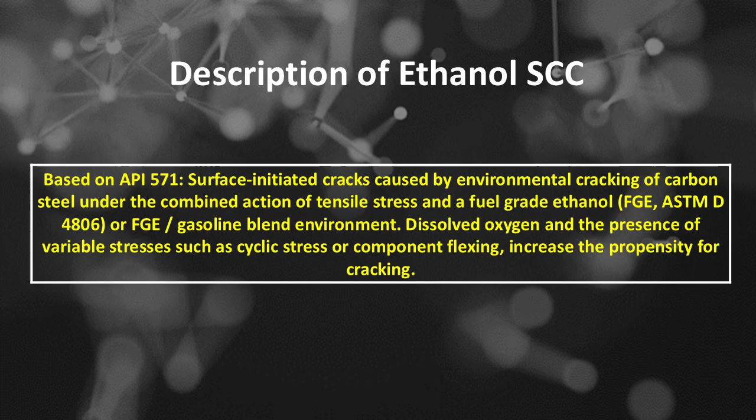Ethanol stress corrosion cracking, or SCC, is a damage mechanism that is part of environment-assisted cracking. Per API 571, it describes surface-initiated cracks caused by environmental cracking of carbon steel under the combined action of tensile stress and a fuel-grade ethanol (FGE, ASTM D4806) or FGE/gasoline blend environment. Dissolved oxygen and variable stresses such as cyclic stress or component flexing increase the propensity for cracking.

Introduction: Stress corrosion cracking, or SCC, is a failure mechanism characterized by the growth of cracks in a material subjected to tensile stress in a corrosive environment. When this occurs specifically in ethanol-containing environments, it is referred to as ethanol stress corrosion cracking. It is a form of environmentally assisted cracking, where the combined effects of chemical environment, tensile stress, and microstructural susceptibility lead to crack initiation and propagation, often resulting in sudden and catastrophic failure of metallic components.

Mechanisms of ethanol SCC damage: Number 1 is environment and chemistry. Ethanol, or C2H5OH, is an alcohol used as a fuel additive, solvent, or industrial chemical. Ethanol environments can be acidic, neutral, or alkaline, with corrosivity influenced by impurities, temperature, and other factors. Ethanol can decompose or react at high temperatures or in the presence of catalysts, producing reactive species such as acetaldehyde, acetic acid, or hydrogen, which can influence corrosion behavior.

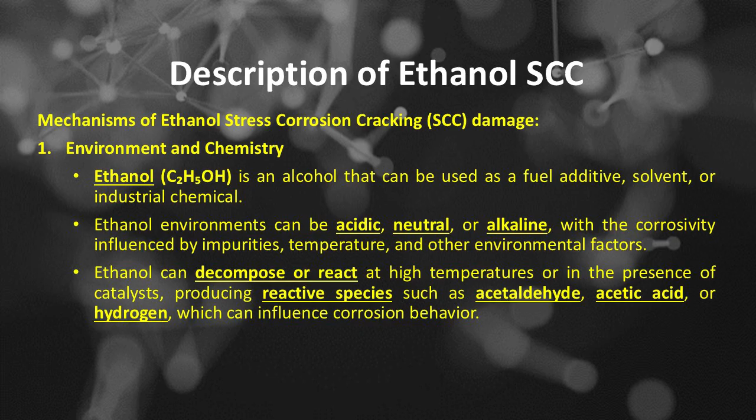Mechanisms of ethanol SCC damage: Number 2 is material susceptibility. Materials vulnerable to ethanol SCC include certain carbon steels, stainless steels, aluminum alloys, and other high-strength alloys. Susceptibility depends on microstructure, alloy composition, heat treatment, and initial residual stresses.

Mechanisms of ethanol SCC damage: Number 3 is crack initiation, which starts at microvoids, inclusions, microstructural heterogeneities, or pre-existing flaws. Localized corrosion or pitting at the surface can serve as initiation sites, and elevated tensile or residual stresses facilitate crack nucleation.

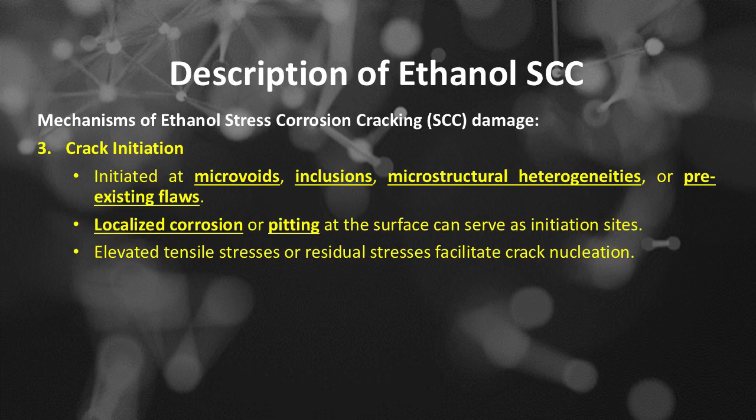Mechanisms of ethanol SCC damage: Number 4 is crack propagation. Crack growth occurs via hydrogen-assisted cracking, film rupture, or intergranular attack. The environment affects film formation on the metal surface; in some cases passivating films, such as oxide layers, may form, but ethanol environments can disrupt these films. The cyclic formation and rupture of protective films create recurrent corrosion sites. Cracks tend to propagate intergranularly or transgranularly depending on the material and environment.

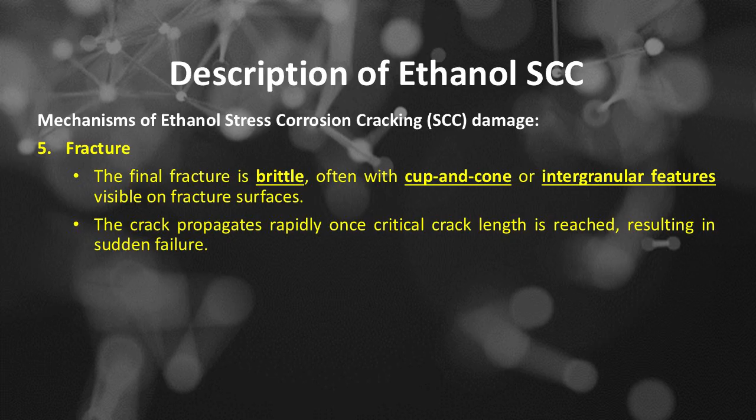Mechanisms of ethanol SCC damage: Number 5 is fracture. The final fracture is brittle, often with cup and cone or intergranular features visible on fracture surfaces. The crack propagates rapidly once critical crack length is reached, resulting in sudden failure.

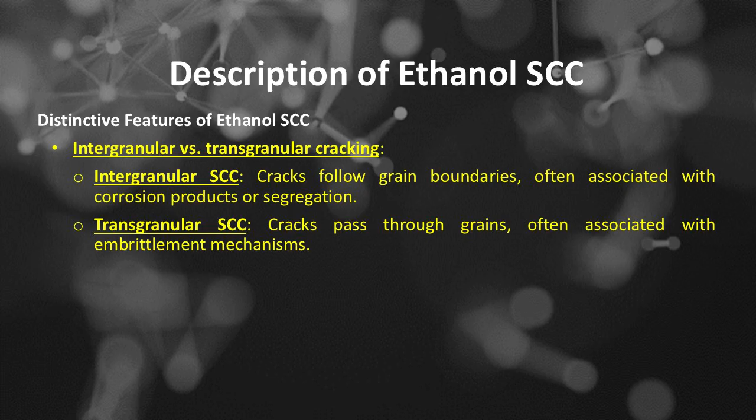Distinctive features of ethanol SCC include environmental dependence, where the presence of ethanol, especially at elevated temperatures, enhances susceptibility. Temperature sensitivity: higher temperatures accelerate corrosion reactions and crack growth. Hydrogen involvement: hydrogen generated during corrosion may diffuse into the metal, facilitating hydrogen embrittlement and crack growth. Microstructure effects: materials with certain microstructures, such as coarse grains or inclusions, are more prone. Intergranular versus transgranular cracking: intergranular SCC cracks follow grain boundaries, often associated with corrosion products or segregation.

Transgranular SCC cracks pass through grains, often associated with embrittlement mechanisms. Factors influencing ethanol SCC: Factor 1, temperature—elevated temperatures increase chemical reaction rates, promoting SCC. Factor 2, ethanol purity and impurities—impurities like water, acids, or other contaminants can increase corrosivity. Factor 3, stress level—tensile stresses above a certain threshold promote crack initiation and growth. Factor 4, material microstructure—grain size, inclusions, and phase distribution influence susceptibility. Factor 5, environmental cycling—fluctuations in environment, such as wet or dry cycles, can accelerate crack propagation.

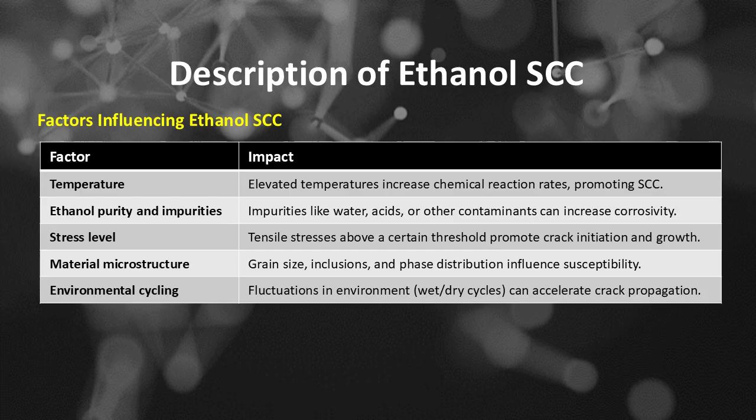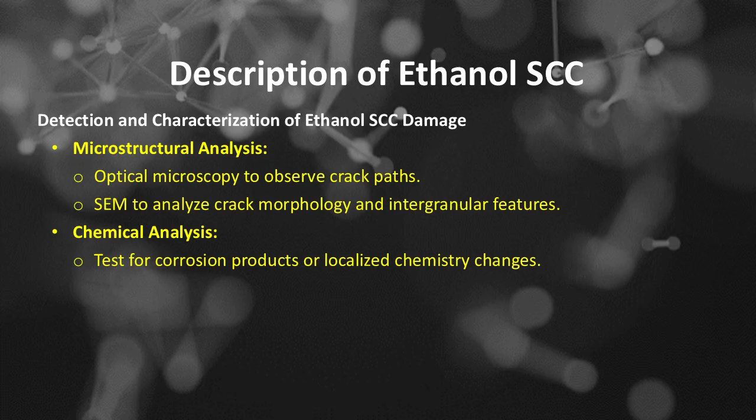Detection and characterization methods for ethanol SCC damage include visual inspection to detect surface cracks, corrosion pits, and blistering; non-destructive testing (NDT) such as ultrasonic testing for internal cracks, eddy current testing for surface crack detection, radiography for internal flaw detection, and replicate fractography or SEM analysis of fracture surfaces. Microstructural analysis includes optical microscopy to observe crack paths, SEM to analyze crack morphology and intergranular features, and chemical analysis to test for corrosion products or localized chemistry changes.

Preventive and mitigation strategies for ethanol SCC damage: first, material selection—using corrosion-resistant alloys or materials with microstructures less susceptible to cracking. Second, environmental control—reducing ethanol temperature or limiting exposure, and removing impurities and controlling water content. Third, stress management—minimizing residual stresses via heat treatments and designing components to avoid stress concentrators.

Preventive and mitigation strategies of ethanol SCC damage continue with the fourth: protective coatings, applied as barrier coatings to prevent ethanol contact.

The fifth is cathodic protection. Its purpose is to use appropriate cathodic systems to suppress corrosion. The sixth is regular inspection and monitoring.

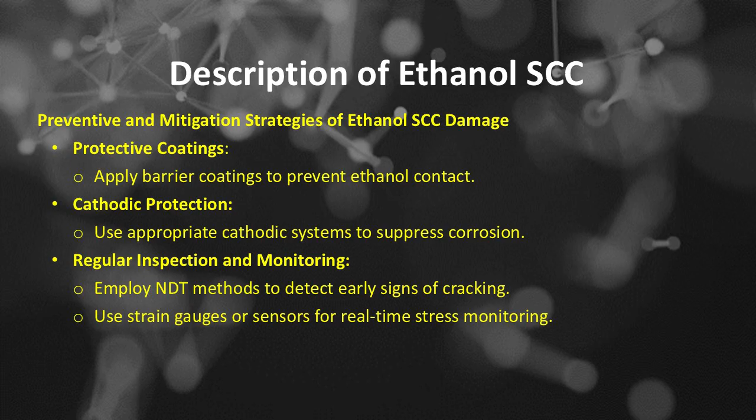Its purpose is to employ NDT methods to detect early signs of cracking and use strain gauges or sensors for real-time stress monitoring. Ethanol stress corrosion cracking is a complex failure process involving the synergistic effects of chemical environment, tensile stresses, and material susceptibility. It typically manifests as intergranular or transgranular cracks that can grow rapidly once initiated, leading to sudden failure.

Understanding the environmental conditions, microstructural factors, and stress state is vital for preventing and controlling ethanol SCC in critical components. Ethanol stress corrosion cracking affects materials based on API 571. Number A, all grades of carbon steel are susceptible.

Number B, ethanol SCC has not been reported in materials other than carbon steel, but general corrosion may be a concern with other materials including some alloys of aluminum, copper and copper alloys, lead and zinc. Number C, FGE and blends with gasoline may adversely affect non-metallic materials, for example coatings and seals, causing swelling, hardness changes, etc.

Here's a detailed overview of materials affected by ethanol stress corrosion cracking or SCC. Ethanol SCC primarily impacts metals and alloys that are exposed to ethanol-containing environments under tensile stresses. The susceptibility varies based on the material's composition, microstructure, surface condition, and operational environment. Below is a comprehensive analysis of the key materials affected, along with their susceptibility and the factors influencing their vulnerability.

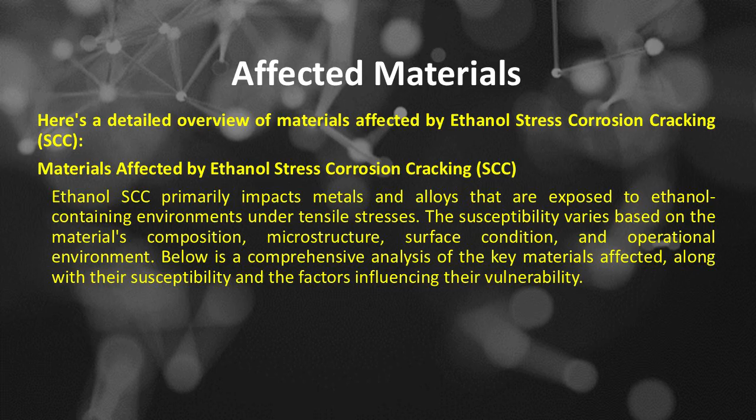Materials affected by ethanol stress corrosion cracking or SCC. Number 1 is carbon steels. Carbon steels are widely used in pipelines, tanks, and structural components. They are composed mainly of iron with varying carbon content.

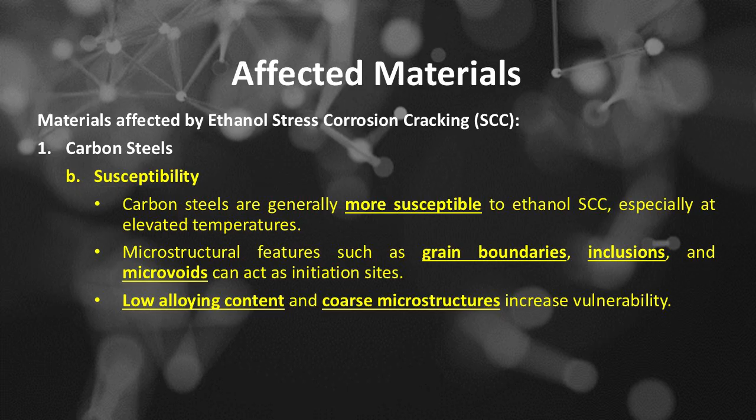Susceptibility of carbon steels includes: carbon steels are generally more susceptible to ethanol SCC, especially at elevated temperatures. Microstructural features such as grain boundaries, inclusions, and microvoids can act as initiation sites. Low alloying content and coarse microstructures increase vulnerability.

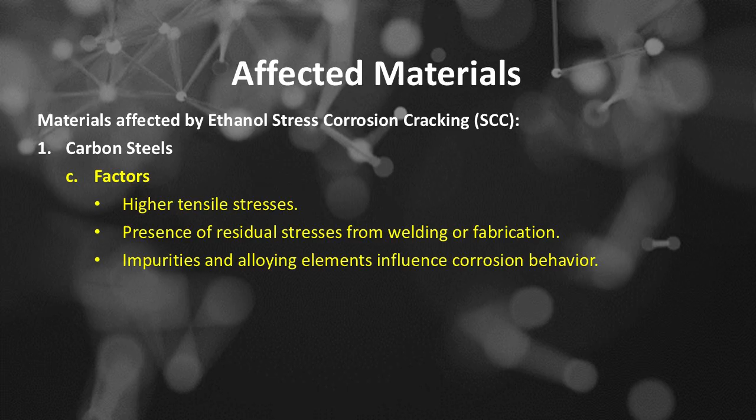Carbon steel factors affected by ethanol SCC include higher tensile stresses, presence of residual stresses from welding or fabrication, and impurities and alloying elements that influence corrosion behavior.

Materials affected by ethanol stress corrosion cracking or SCC. Number 2 is stainless steels, including: A, austenitic stainless steels, such as types 304, 316, generally resistant to many forms of SCC in aqueous environments, however susceptible under specific conditions involving ethanol at elevated temperatures or in aggressive environments. B, ferritic and martensitic stainless steels are more prone to SCC in ethanol environments due to their microstructural characteristics and lower corrosion resistance.

Stainless steel susceptibility factors affected by ethanol stress corrosion cracking or SCC include presence of chlorides or other halides, which can enhance SCC sensitization, chromium carbide precipitation at grain boundaries increasing intergranular attack, and microstructural heterogeneities like inclusions or segregation.

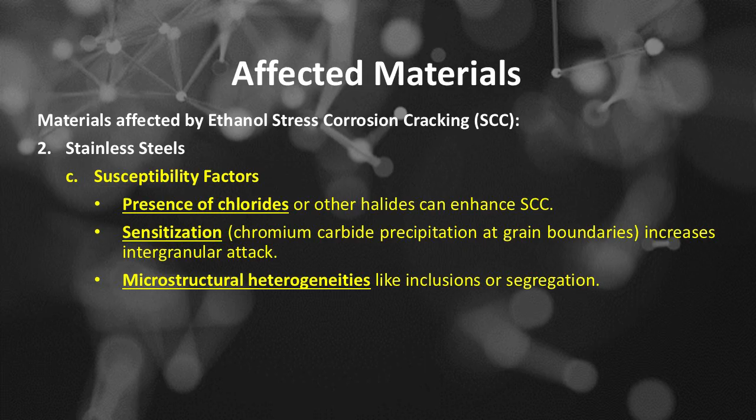Materials affected by ethanol stress corrosion cracking or SCC. Number 3 is aluminum and aluminum alloys, generally less susceptible to ethanol SCC. However, high-strength aluminum alloys, especially those with intergranular precipitation or microstructural defects, may experience localized corrosion or cracking under stress in ethanol environments.

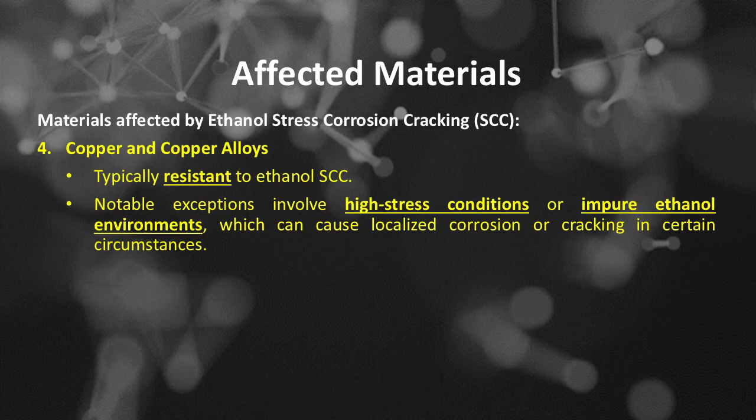Materials affected by ethanol stress corrosion cracking or SCC. Number 4 is copper and copper alloys, typically resistant to ethanol SCC. Notable exceptions involve high-stress conditions or impure ethanol environments, which can cause localized corrosion or cracking in certain circumstances.

Materials affected by ethanol stress corrosion cracking or SCC. Number 5 is nickel and nickel alloys, such as Inconel, Monel. High corrosion resistance makes them less susceptible. Inconel alloys, such as Inconel 600 or 625, are often used in harsh environments, but susceptibility increases if microstructural heterogeneities or impurities exist.

Materials affected by ethanol stress corrosion cracking or SCC. Number 6 is high-strength alloys and superalloys. High-strength steels and superalloys, such as Inconel, Hastelloy, may resist SCC in some environments but can become susceptible under high tensile stresses, especially at elevated temperatures.

Materials affected by ethanol stress corrosion cracking or SCC. Number 7 is other metallic materials. Titanium and titanium alloys are generally resistant but can be affected under specific conditions, especially if contaminated or under high stress.

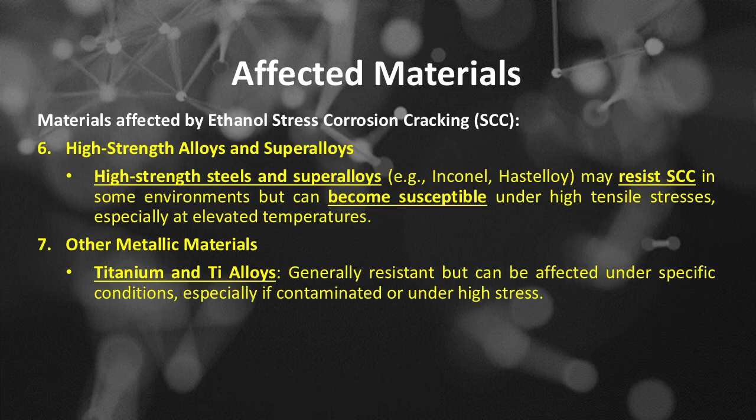Factors affecting material susceptibility to ethanol stress corrosion cracking include grain size and inclusions. Finer grains often reduce susceptibility, while inclusions increase SCC risk. Presence of impurities or segregations promotes localized attack or stress corrosion cracking. Heat treatment or microstructural instability leads to susceptibility to sensitization, increasing intergranular SCC risk. Elevated temperature and impurities increase susceptibility to ethanol stress corrosion cracking.

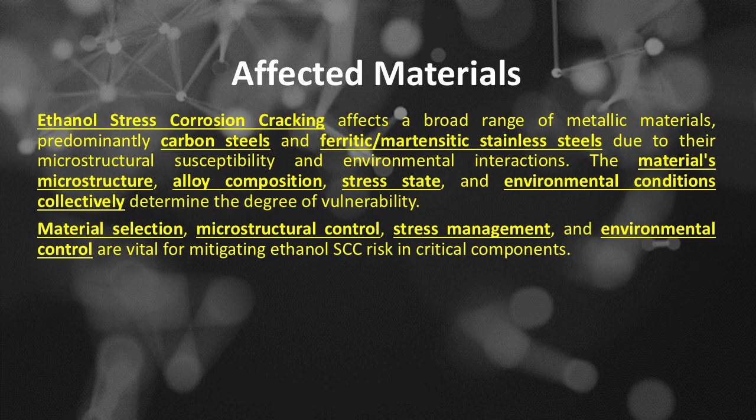Ethanol stress corrosion cracking affects a broad range of metallic materials, predominantly carbon steels and ferritic/martensitic stainless steels, due to their microstructural susceptibility and environmental interactions. The material's microstructure, alloy composition, stress state, and environmental conditions collectively determine the degree of vulnerability. Material selection, microstructural control, stress management, and environmental control are vital for mitigating ethanol SCC risk in critical components.

Ethanol stress corrosion cracking damage mechanisms. Critical factors based on API 571, Number A: several factors have been identified by field observations.

Stress may be applied or residual. Highly stressed, locally cold worked components or components with stress concentrators are susceptible to cracking. Variable stresses, such as those produced by loading and unloading of tanks, have led to cracking in tank bottoms and floating roofs.

Cracking has been found to occur in FGE meeting ASTM D4806 specifications, including the water content requirement. Corrosion inhibitors may be added to ethanol to prevent general corrosion in vehicle fuel systems, but their effect on SCC is not fully understood.

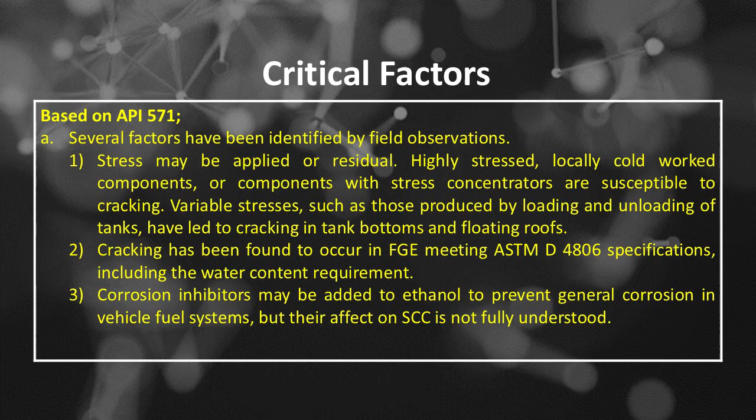Other factors have been identified in controlled laboratory conditions using conservative slow strain rate test (SSRT) methods, which stress the steel sample to failure. Evidence of SCC is based on the stress or strain behavior and an examination of the fracture surfaces.

Aeration: the dissolved oxygen content of the ethanol appears to be the most important factor for determining ethanol SCC susceptibility. Cracking has not been found under deaerated conditions.

The maximum potential for ethanol SCC occurs within a narrow range of water content, between 0.1 and 4.5 vol%. Ethanol SCC has been found to occur in blends of FGE and gasoline containing as little as 20 vol% FGE. Galvanic coupling of a new steel to corroded steel increases the likelihood of ethanol SCC.

Increasing the chloride content of the ethanol tends to increase the severity of cracking and changes the crack type from mainly intergranular, found in the field, to transgranular cracking.

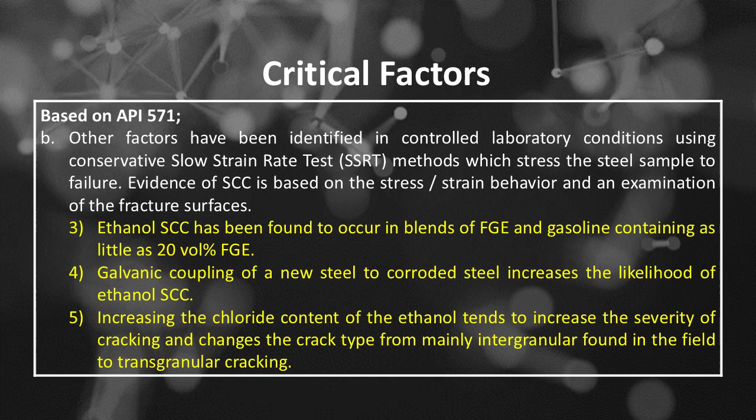Here's a comprehensive and detailed explanation of the critical factors that influence ethanol stress corrosion cracking (SCC) damage. Ethanol SCC is a complex phenomenon governed by the interplay of environmental, material, and operational parameters. The critical factors are those conditions or properties that must be present or exceed certain thresholds to initiate and propagate SCC. Understanding these factors is essential for predicting, preventing, and controlling ethanol SCC damage.

Critical factors influencing ethanol SCC include, number 1, environmental factors: A) ethanol composition and purity. Ethanol concentration: higher ethanol content generally increases the risk of SCC due to enhanced chemical reactivity and corrosivity. Impurities: presence of water, acids, halides such as chlorides, or other contaminants can significantly increase corrosivity. Decomposition products: at elevated temperatures, ethanol can produce reactive species such as acetaldehyde, acetic acid, or hydrogen, which influence corrosion processes.

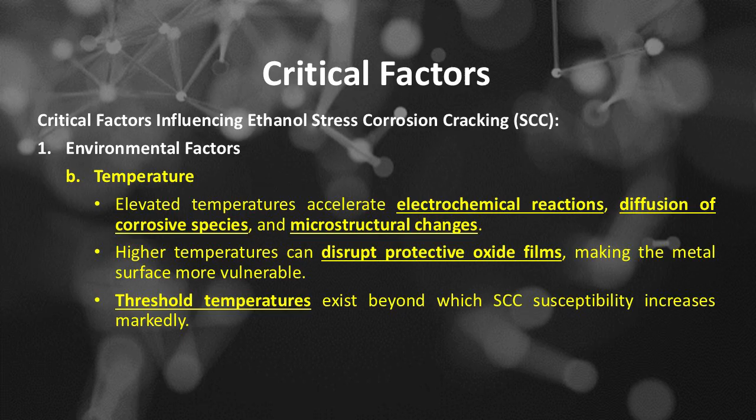Environmental factors, B) temperature. Elevated temperatures accelerate electrochemical reactions, diffusion of corrosive species, and microstructural changes. Higher temperatures can disrupt protective oxide films, making the metal surface more vulnerable. Threshold temperatures exist beyond which SCC susceptibility increases markedly.

Environmental factors, C) pH and electrochemical conditions. Acidic or neutral environments tend to promote corrosion. Changes in pH can alter passivity and film stability on metal surfaces. The presence of chlorides or halides can break down passive films and promote localized attack.

Environmental factors, D) cyclic environmental conditions. Fluctuations between wet and dry states can cause repetitive film formation and rupture, promoting crack initiation and growth. Temperature cycling can induce thermal stresses that synergize with chemical attack.

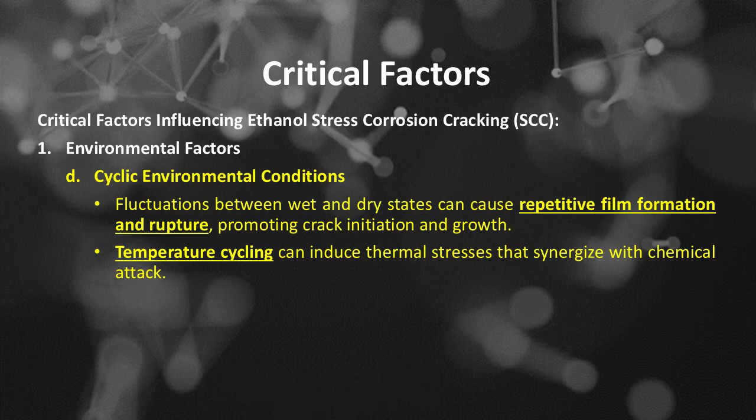Critical factors influencing ethanol SCC, number 2, material factors: A) microstructure of the material. Grain size: finer grains often have higher susceptibility due to larger grain boundary area. Inclusions and segregations: non-metallic inclusions or segregated impurities act as initiation sites. Heat treatment state: sensitized microstructures with chromium carbide precipitation at grain boundaries are more vulnerable.

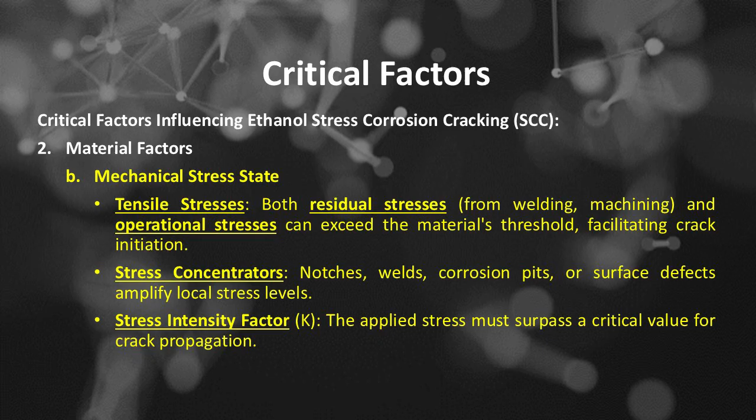Material factors, B) mechanical stress state, tensile stresses. Both residual stresses, from welding and machining, and operational stresses can exceed the material's threshold, facilitating crack initiation. Stress concentrators: notches, welds, corrosion pits, or surface defects amplify local stress levels. Stress intensity factor K: the applied stress must surpass a critical value for crack propagation.

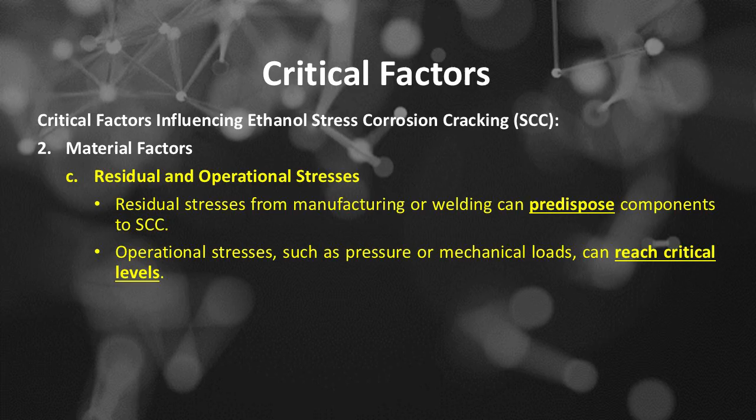Material factors, C) residual and operational stresses. Residual stresses from manufacturing or welding can predispose components to SCC. Operational stresses, such as pressure or mechanical loads, can reach critical levels.

Material factors, D) material susceptibility. Alloy composition, microstructural stability, and surface condition influence vulnerability. High-strength alloys often have higher susceptibility due to their susceptibility to embrittlement under corrosive conditions.

Critical factors influencing ethanol SCC, number 3, environmental material interaction factors: A) protective film formation and stability. Passivity: formation of oxide or film layers that protect the surface. Film breakdown: ethanol environments can disrupt or prevent stable passive film formation. Repassivation rate: the ability of the material to reform protective films after rupture influences SCC susceptibility.

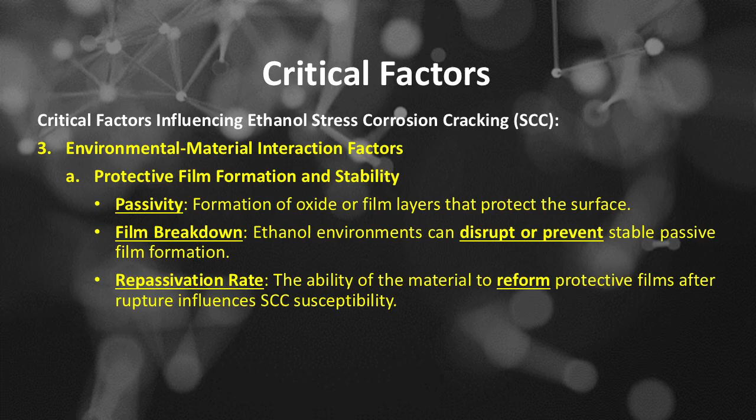Critical factors influencing ethanol SCC, number 4, operational and design factors: A) stress level and distribution. Stresses exceeding the material's threshold are critical.

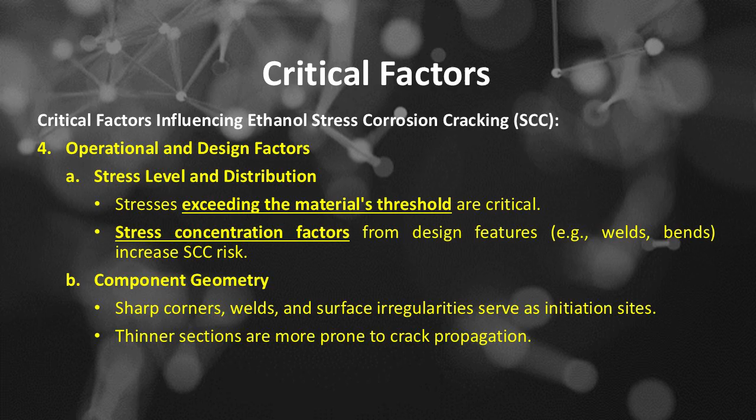Stress concentration factors from design features, such as welds and bends, increase SCC risk. Operational and design factor B is component geometry: sharp corners, welds, and surface irregularities serve as initiation sites, while thinner sections are more prone to crack propagation.

Critical factors influencing ethanol stress corrosion cracking, or SCC. Number 5 is threshold and critical conditions: critical stress intensity factor, the minimum stress intensity required for SCC crack growth; critical environment composition, a threshold ethanol purity, impurity level, or temperature that must be exceeded for SCC to occur; and time to crack initiation, the time required for microcracks to form under given conditions.

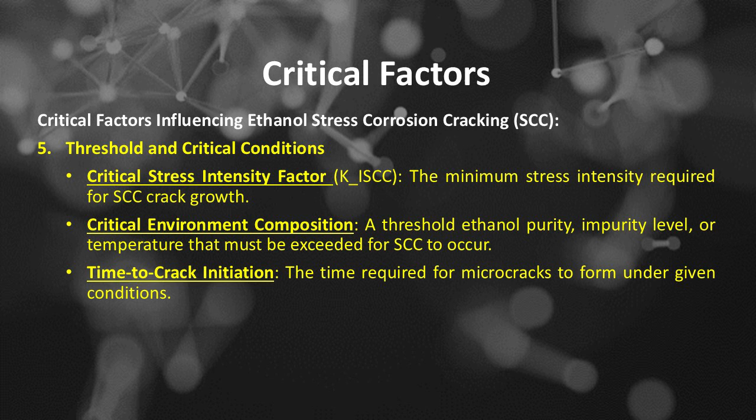The critical factors for ethanol SCC damage are those that create a conducive environment for crack initiation and provide the necessary stresses and microstructural vulnerabilities for crack growth. These include elevated temperature, tensile stresses surpassing threshold levels, microstructural features, presence of impurities, and disruption of protective films. Effective mitigation involves controlling these factors, such as reducing residual stresses, selecting resistant materials, maintaining favorable environmental conditions, and implementing appropriate inspection regimes.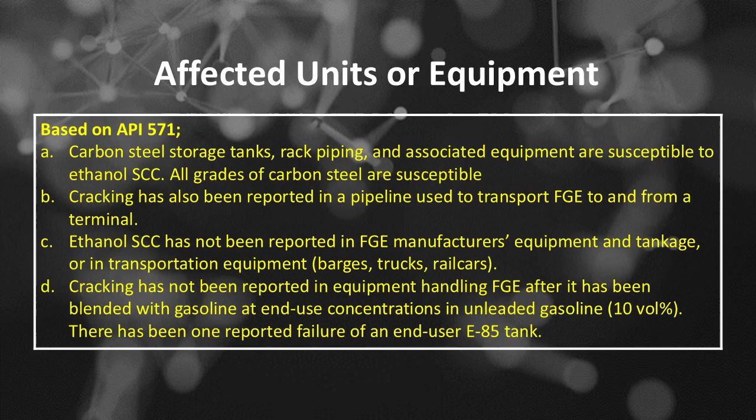Number B: cracking has also been reported in a pipeline used to transport FGE to and from a terminal. Number C: ethanol SCC has not been reported in FGE manufacturers' equipment and tankage, or in transportation equipment such as barges, trucks, and railcars. Number D: cracking has not been reported in equipment handling FGE after it has been blended with gasoline at end-use concentrations in unleaded gasoline, 10 vol%. There has been one reported failure of an end-user E85 tank.

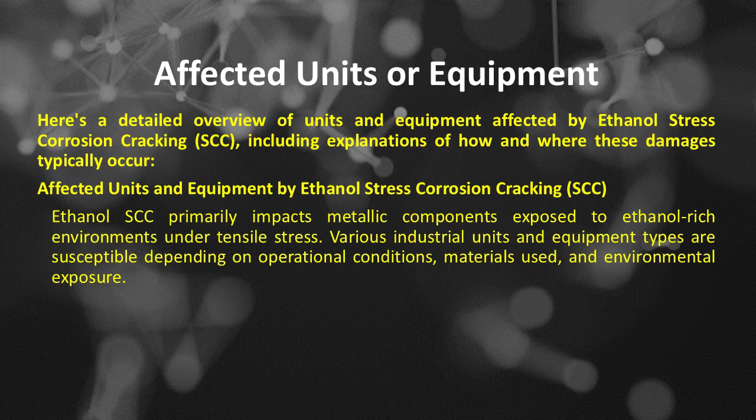Here's a detailed overview of units and equipment affected by ethanol stress corrosion cracking, SCC, including explanations of how and where these damages typically occur. Ethanol SCC primarily impacts metallic components exposed to ethanol-rich environments under tensile stress. Various industrial units and equipment types are susceptible depending on operational conditions, materials used, and environmental exposure.

Affected units and equipment by ethanol stress corrosion cracking includes, number 1, pipelines and storage systems, used for transport of ethanol and ethanol-containing fuels, widely used in oil, gas, fuel distribution, and chemical industries. Susceptible locations include welded joints and heat-affected zones, HAZ, where microstructural heterogeneities make these areas vulnerable.

Other susceptible locations include bends, elbows, and T's, which are locations with high stress concentration, as well as thin sections or corrosion pits, which are microdefects that can initiate cracking. Damage manifestation includes longitudinal or transverse cracks starting at welds or defect sites, with propagation leading to leaks, ruptures, or catastrophic failures.

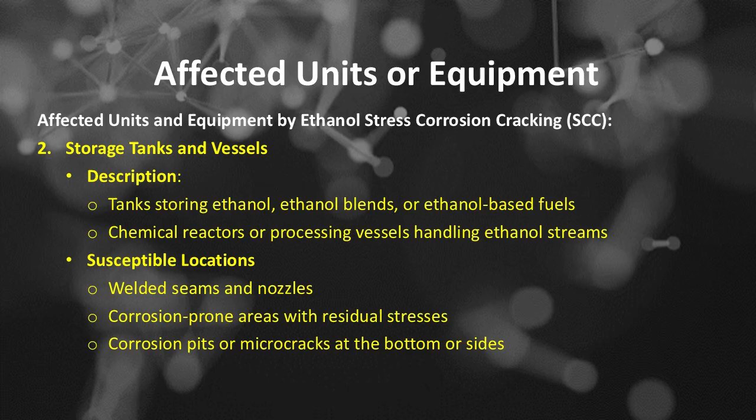Affected units and equipment by ethanol stress corrosion cracking, number 2, storage tanks and vessels, includes tanks storing ethanol, ethanol blends, or ethanol-based fuels, as well as chemical reactors or processing vessels handling ethanol streams. Susceptible locations include welded seams and nozzles, corrosion-prone areas with residual stresses, and corrosion pits or microcracks at the bottom or sides.

Damage manifestation includes cracks propagating from weld defects or corrosion sites, with potential for sudden leaks or structural failure, especially under internal pressure. Affected units and equipment, number 3, heat exchangers, includes devices exchanging heat between ethanol-containing fluids and other process streams, with components including tubes, shells, headers, and welds.

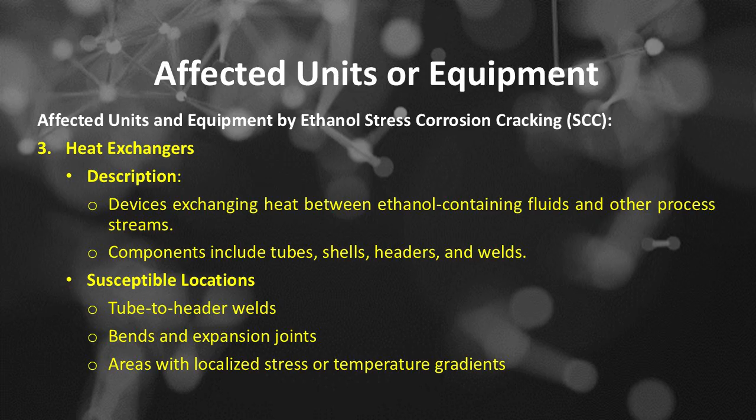Heat exchangers' susceptible locations include tube-to-header welds, bends and expansion joints, and areas with localized stress or temperature gradients. Damage manifestation includes cracks initiating at welds or stress concentrators, reduced heat transfer efficiency, and risk of fluid leakage.

Affected units and equipment by ethanol stress corrosion cracking, number 4, valves and fittings, includes control devices regulating fluid flow in ethanol handling systems, such as ball valves, gate valves, check valves, and fittings.

Valves and fittings' susceptible locations include seals, seats, and weld joints, areas with high operational stresses or vibration. Damage manifestation includes crack initiation at welds or stress points, and leakage or failure of valve components, affecting process safety.

Affected units and equipment by ethanol stress corrosion cracking, number 5, pumps and compressors, includes mechanical equipment moving ethanol or ethanol mixtures, critical in fuel dispensers, processing plants, and transportation units. Susceptible locations include shaft welds and coupling points, impeller blades and casing welds, and bearings and stress concentration points.

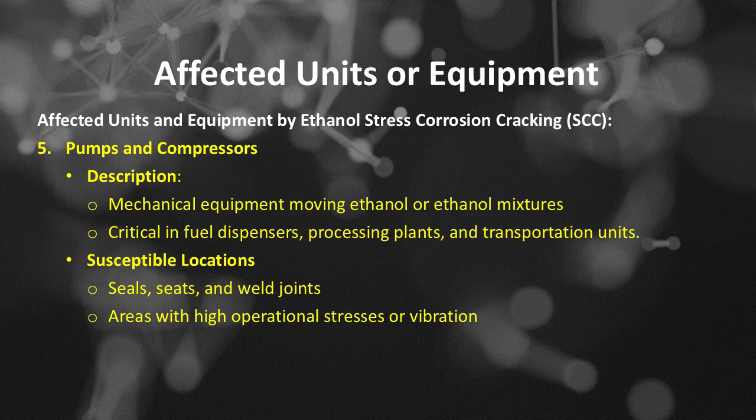Pumps and compressors damage manifestation includes cracks that compromise pump integrity, leading to leaks or failure, and possible catastrophic breakdowns if cracking propagates unnoticed. Affected units and equipment by ethanol stress corrosion cracking.

Number 6 is storage and transport containers, includes tanks, drums, or containers used for storing ethanol or ethanol blends, often constructed from carbon steel, stainless steel, or alloys.

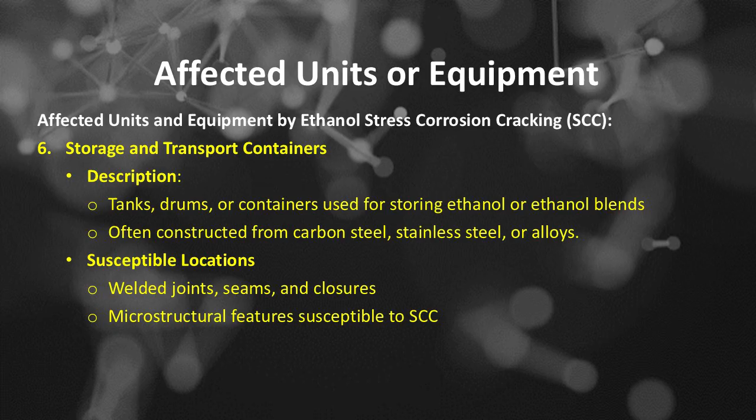Storage and transport containers susceptible locations includes welded joints, seams, and closures, microstructural features susceptible to SCC.

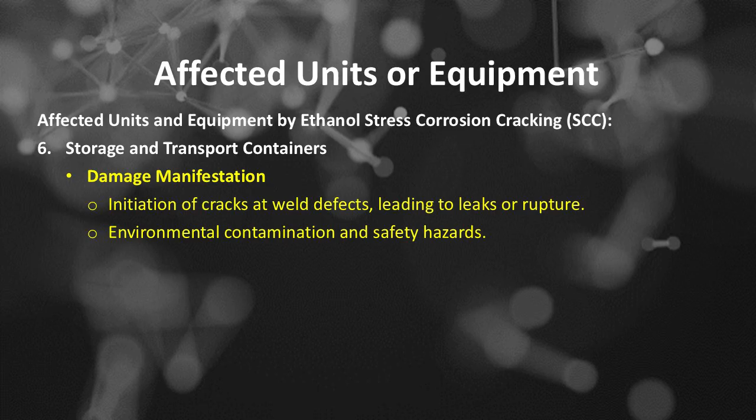Storage and transport containers damage manifestation includes initiation of cracks at weld defects, leading to leaks or rupture, environmental contamination and safety hazards. Affected units and equipment by ethanol stress corrosion cracking.

Number 7 is process equipment in chemical and fuel industries, includes reactors, mixers, separators, and other process units handling ethanol streams. Susceptible locations include welded joints, microvoids, or areas with residual stresses.

Equipment with temperature fluctuations or cyclic stresses. Process equipment in chemical and fuel industries damage manifestation includes cracks reducing structural integrity, risking process leaks or shutdowns.

Operational and safety implications includes leakage and environmental contamination. Cracks can lead to ethanol leaks, posing fire, health, and environmental hazards.

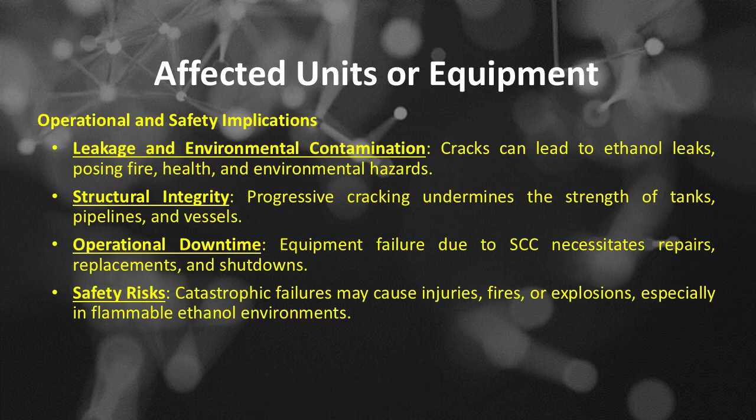Structural integrity: progressive cracking undermines the strength of tanks, pipelines, and vessels. Operational downtime: equipment failure due to SCC necessitates repairs, replacements, and shutdowns. Safety risks: catastrophic failures may cause injuries, fires, or explosions, especially in flammable ethanol environments.

Ethanol SCC affects a broad range of industrial units and equipment, especially those with welded joints, residual stresses, and microstructural vulnerabilities. The most vulnerable locations include welded seams, bends, corrosion pits, and stress concentration zones. Early detection, material selection, and proper maintenance are critical to prevent damage and ensure safe operation.

Ethanol stress corrosion cracking appearance or morphology of damage based on API 571. Number A, ethanol SCC is often found in the vicinity of welds and can appear as cracks that are parallel to the weld or transverse to the weld.

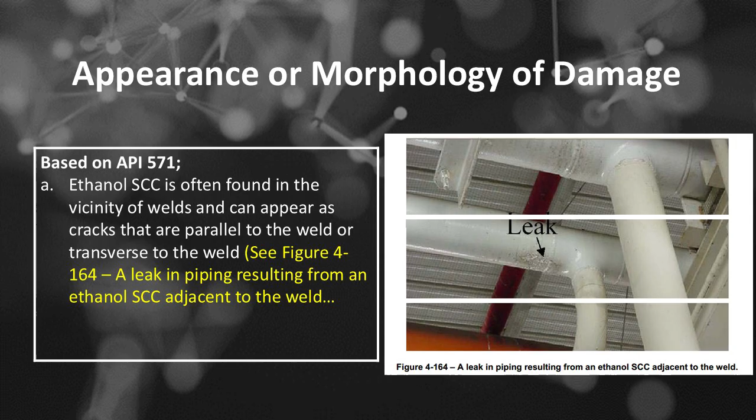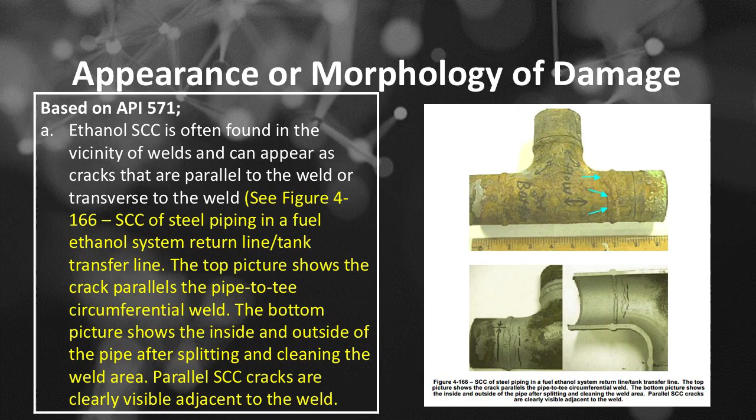The top picture shows the crack parallels the pipe tee circumferential weld. The bottom picture shows the inside and outside of the pipe after splitting and cleaning the weld area. Parallel SCC cracks are clearly visible adjacent to the weld.

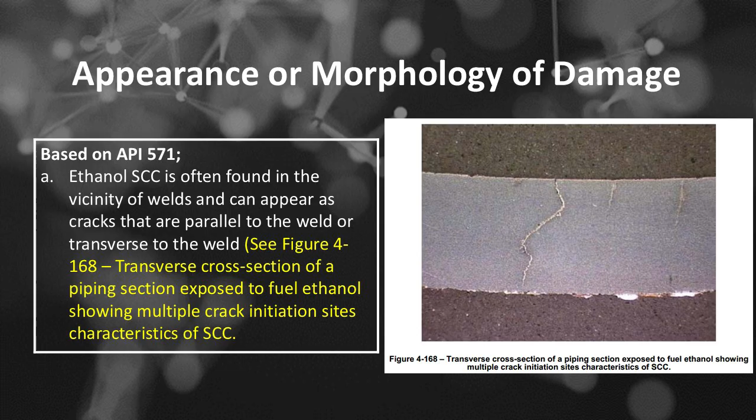Number B, cracks are typically tight and may be filled with corrosion product. Number C, ethanol SCC cracks are typically branched and intergranular, but transgranular or mixed mode cracking has also been reported.

Field failures tend to be intergranular, while laboratory testing has produced all crack morphologies. The cracking mode appears to depend on the chloride level, with an increased chloride content tending to shift the cracking from intergranular to transgranular or mixed mode.

Number D, microstructure of materials subjected to ethanol SCC are typically ferrite, or ferrite and pearlite.

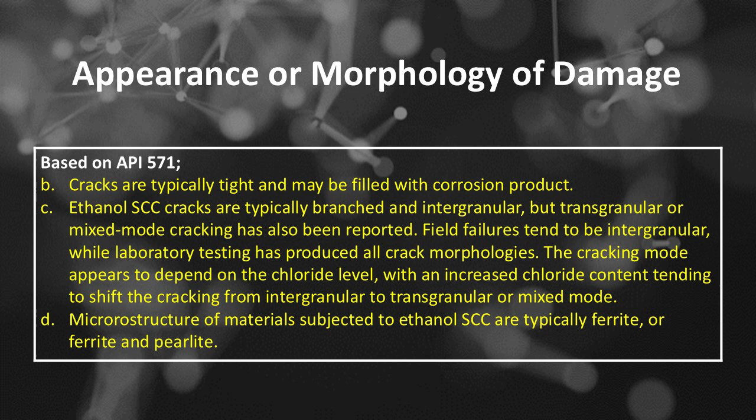Here's a detailed explanation of the appearance and morphology of ethanol stress corrosion cracking, SCC, damage. The morphology of SCC damage refers to the visual and microstructural features that characterize cracks and related corrosion phenomena caused by the synergistic action of tensile stresses and corrosive ethanol environments. Understanding these features is crucial for damage identification, failure analysis, and preventive measures.

Appearance and morphology of ethanol stress corrosion cracking damage includes: number 1 is macroscopic appearance, includes: number A, fracture surface features, such as ductile and brittle appearance.

Ethanol SCC often exhibits a brittle fracture morphology, characterized by a rough, faceted surface with features resembling intergranular or transgranular cracks. In some cases, especially under lower stress or in less susceptible microstructures, the fracture may appear mixed mode, combining features of ductile and brittle failure.

Macroscopic appearance, number B is visible cracks, includes: longitudinal cracks.

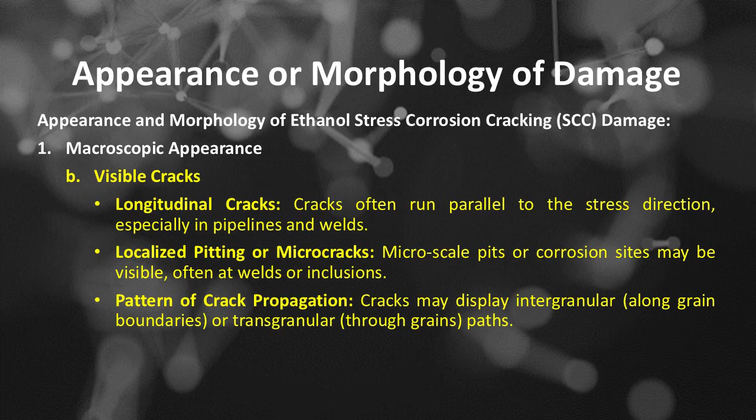Cracks often run parallel to the stress direction, especially in pipelines and welds. Localized pitting or microcracks, microscale pits or corrosion sites, may be visible, often at welds or inclusions. Cracks may display intergranular (along grain boundaries) or transgranular (through grains) propagation paths. Macroscopic surface features include rough, granular, or faceted surfaces indicative of brittle fracture modes, with step-like features resulting from crack propagation across microstructural features.

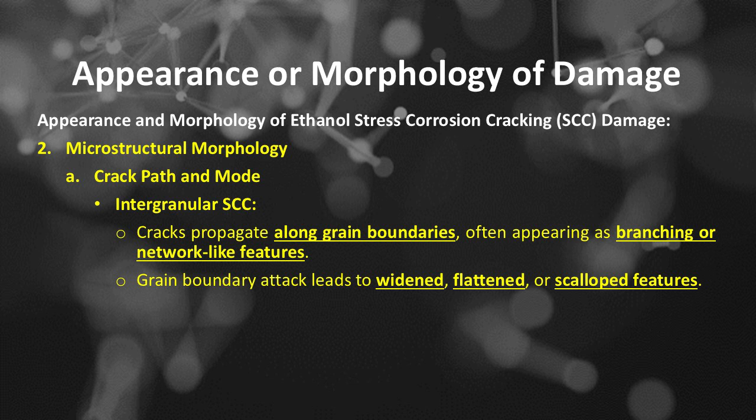Appearance and morphology of ethanol stress corrosion cracking damage. Number 2 is microstructural morphology, including crack path and mode. Intergranular SCC: cracks propagate along grain boundaries, often appearing as branching or network-like features, with grain boundary attack leading to widened, flattened, or scalloped features. Transgranular SCC: cracks cut through grains, often along slip planes or microstructural weaknesses, exhibiting cleavage facets and striations indicating cyclic or stepwise crack growth.

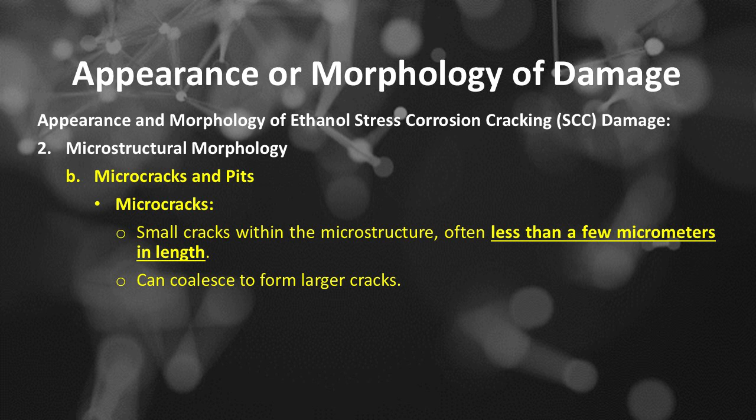Appearance and morphology of ethanol stress corrosion cracking damage. Microstructural morphology category B is microcracks and pits. Microcracks are small cracks within the microstructure, often less than a few micrometers in length, which can coalesce to form larger cracks. Corrosion pits are microvoids or pitting corrosion sites that often act as crack initiation points, typically rounded or irregular, and may be associated with inclusions or impurities.

Microstructural features include decalcification or carbide precipitation, such as chromium carbide precipitates at grain boundaries, with sensitization facilitating intergranular SCC. Inclusions: non-metallic inclusions act as stress concentrators and initiation sites for cracks.

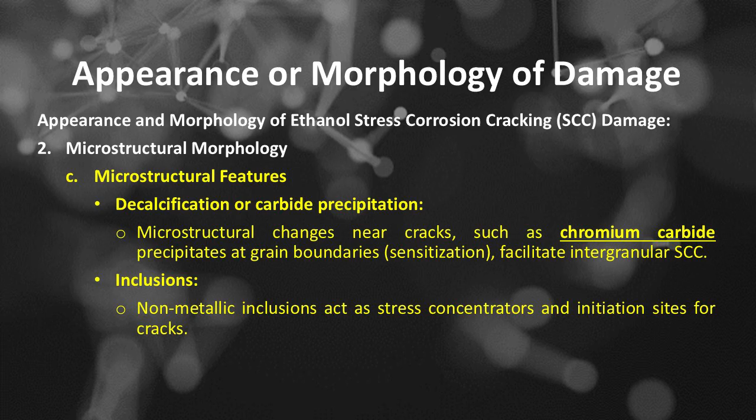Appearance and morphology of ethanol stress corrosion cracking damage. Number 3 is fractography features, including faceted fracture surfaces - intergranular facets appear as flat, smooth surfaces along grain boundaries, indicating brittle intergranular cracking typical of SCC.

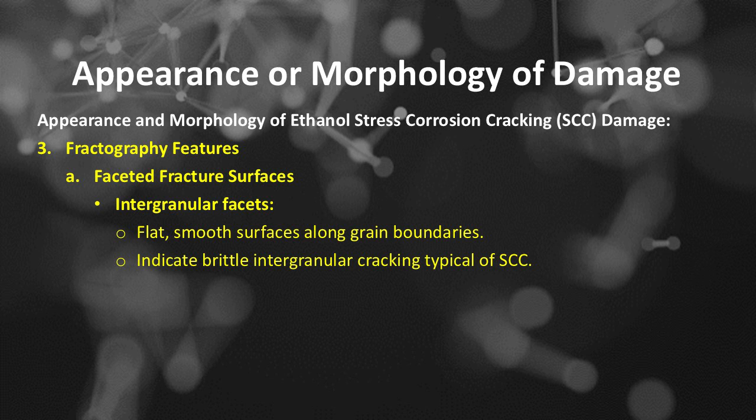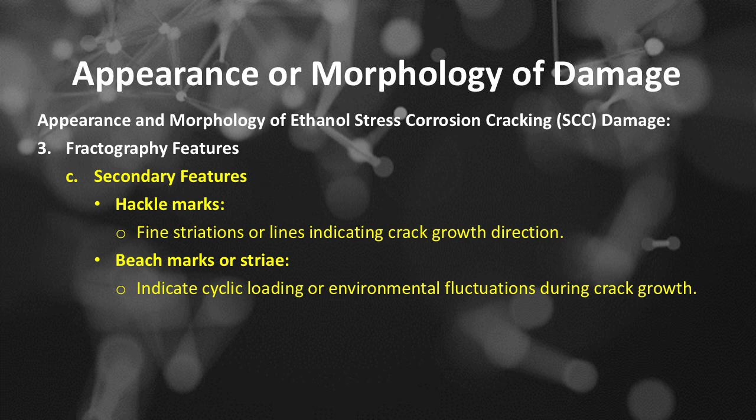Fractography feature B is step-like or terraced morphology. Cracks may show stepwise propagation, especially in transgranular SCC, with these steps often associated with microstructural barriers like grain boundaries or precipitates. Secondary features include hackle marks - fine striations or lines indicating crack growth direction - and beach marks or striae, indicating cyclic loading or environmental fluctuations during crack growth.

Microstructural cross-section features include crack tip morphology, which often exhibits microvoid coalescence or cleavage facets, and widened grain boundaries due to corrosion attack, appearing wider and more irregular, with localized corrosion zones showing discoloration, corrosion products, or oxide layers.

Corrosion products and deposits include oxide or acetate layers that may form on fracture surfaces, slightly obscuring morphology, and hydrogen-induced blisters or cracks, where underlying microstructural damage may be associated with hydrogen embrittlement features.

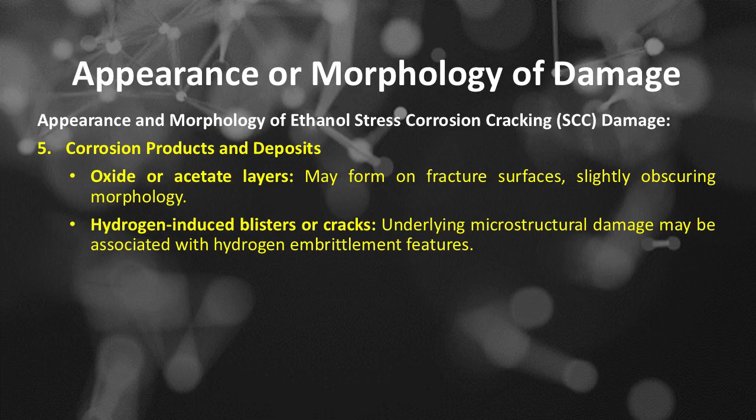The appearance and morphology of ethanol SCC damage are characterized by brittle fracture features, intergranular or transgranular cracks, and microstructural evidence of corrosion attack, such as pits and widened grain boundaries. These features are critical for damage assessment and failure analysis in ethanol handling equipment.

Ethanol stress corrosion cracking damage prevention and mitigation based on API 571. The likelihood of ethanol SCC can be reduced through PWHT when possible, or by applying coatings. Given the low threshold stress intensities required to initiate ethanol SCC, standard carbon steel PWHT is expected to be effective; research to confirm this is currently underway.

Avoid designs with highly localized tensile stresses. Avoid the usage of lap seam welds that may concentrate strain in components. Minimize cold working during fabrication.

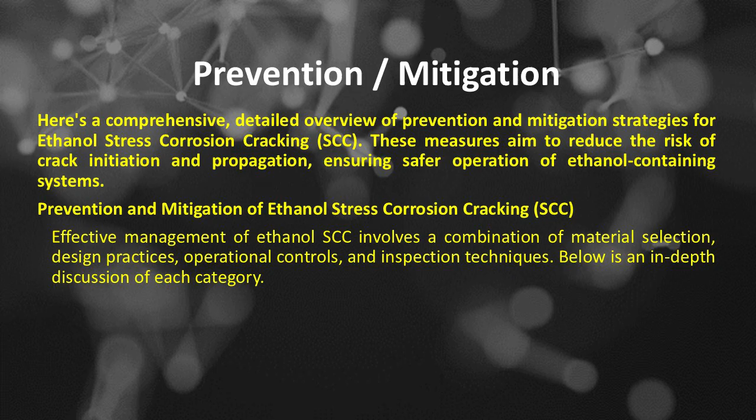Here's a comprehensive, detailed overview of prevention and mitigation strategies for ethanol stress corrosion cracking. These measures aim to reduce the risk of crack initiation and propagation, ensuring safer operation of ethanol-containing systems. Effective management of ethanol SCC involves a combination of material selection, design practices, operational controls, and inspection techniques. Below is an in-depth discussion of each category.

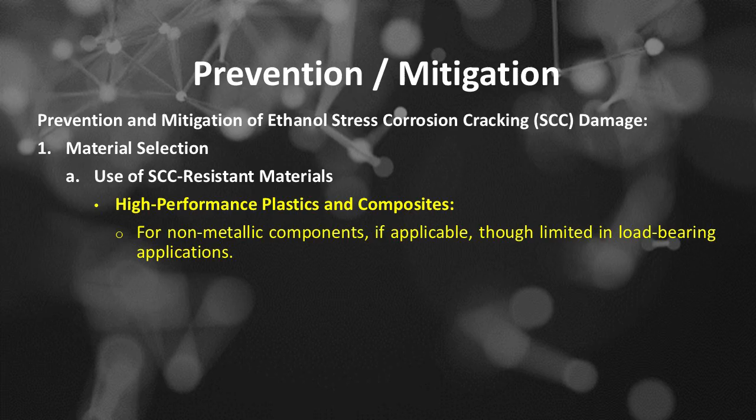Prevention and mitigation of ethanol stress corrosion cracking damage includes material selection: use of SCC-resistant materials. First, using corrosion-resistant alloys including stainless steels, for example 304L, 316L, 321, 347, with low carbon content to minimize carbide precipitation, and nickel-based alloys such as Inconel and Monel for highly aggressive environments. Second, using high-performance plastics and composites for non-metallic components, if applicable, though limited in load-bearing applications.

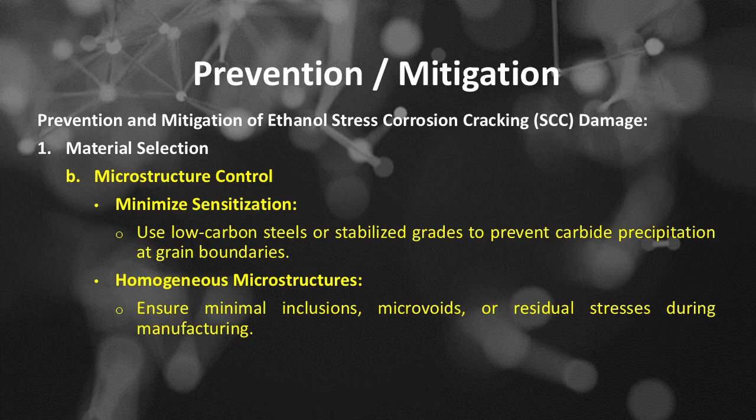Material selection includes microstructure control: minimize sensitization by using low-carbon steels or stabilized grades to prevent carbide precipitation at grain boundaries, and ensure homogeneous microstructures with minimal inclusions, microvoids, or residual stresses during manufacturing.

Prevention and mitigation of ethanol stress corrosion cracking damage, number 2 is design considerations. Stress reduction includes eliminating or minimizing residual stresses through proper welding procedures, post-weld heat treatments, and stress relief annealing, and designing for stress distribution by avoiding abrupt changes in cross-section, sharp bends, or stress concentrators, using smooth transitions instead.

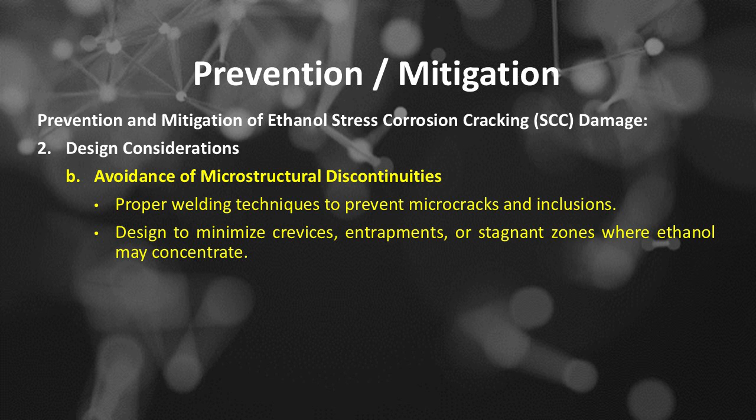Incorporate gradual geometrical changes to reduce localized stress. Design considerations include avoidance of microstructural discontinuities, proper welding techniques to prevent microcracks and inclusions, and designs to minimize crevices, entrapments, or stagnant zones where ethanol may concentrate.

Number 3 is environmental control. A, control of ethanol composition: limit ethanol concentration, lower ethanol content if feasible, as higher concentrations tend to increase SCC susceptibility; reduce water content to minimize moisture levels that can facilitate corrosion processes.

B, control of operating conditions: temperature management, keep operating temperatures below critical thresholds where SCC accelerates; avoid cyclic stresses and fluctuations by reducing cyclic loading or thermal fluctuations that promote crack initiation. C, use of inhibitors: application of corrosion inhibitors compatible with ethanol systems to suppress corrosion reactions.

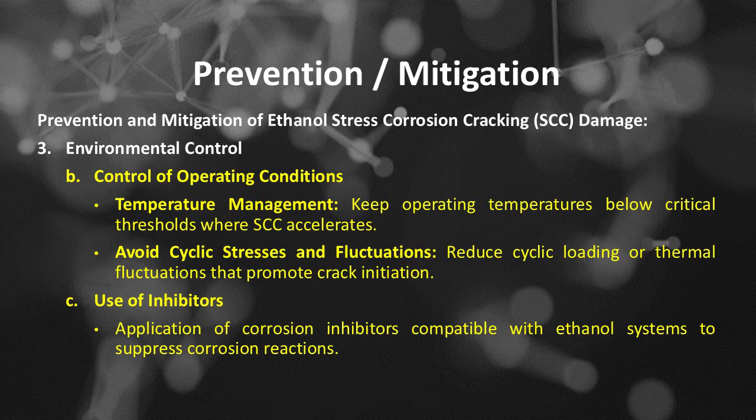Prevention and mitigation of ethanol stress corrosion cracking damage. Number 4 is protective coatings and barriers. A, coatings: organic coatings such as epoxy or polyurethane to isolate metal surfaces from ethanol exposure, and metallic coatings such as cladding or overlays of corrosion-resistant materials.

B, linings in tanks and pipelines: use of compatible linings to prevent direct contact between ethanol and susceptible metals. Prevention and mitigation of ethanol stress corrosion cracking damage.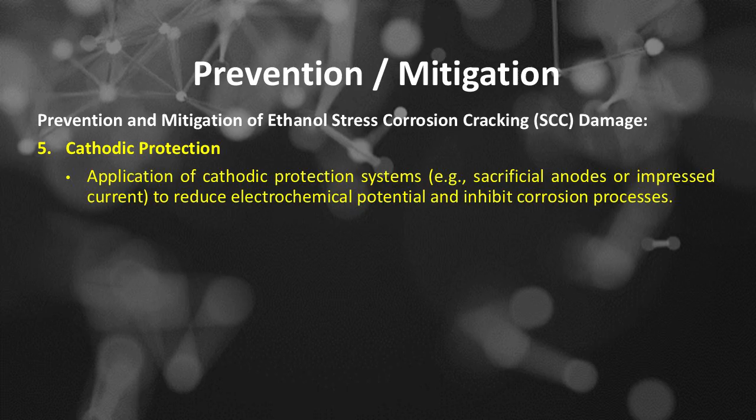Number 5 is cathodic protection: application of cathodic protection systems, such as sacrificial anodes or impressed current, to reduce electrochemical potential and inhibit corrosion processes. Prevention and mitigation of ethanol stress corrosion cracking damage.

Number 6 is maintenance and operational practices. A, regular inspection and monitoring, including non-destructive evaluation (NDE) such as ultrasonic testing, radiography, dye penetrant, and eddy current inspections to detect early cracks or corrosion, and visual inspections with frequent surface checks for discoloration, pitting, or microcracks.

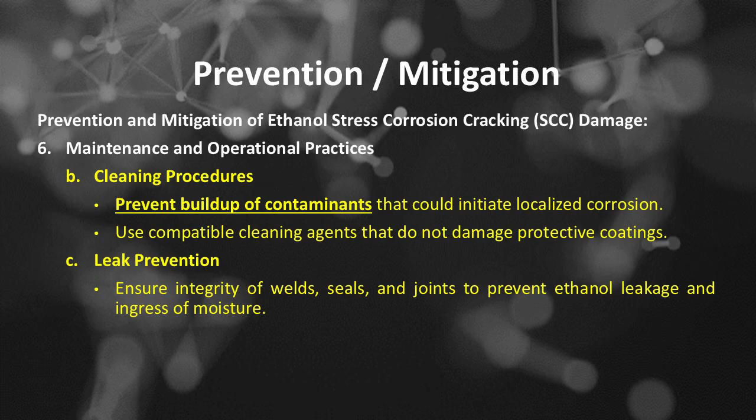B, cleaning procedures: prevent buildup of contaminants that could initiate localized corrosion, and use compatible cleaning agents that do not damage protective coatings. C, leak prevention: ensure integrity of welds, seals, and joints to prevent ethanol leakage and ingress of moisture.

Prevention and mitigation of ethanol stress corrosion cracking damage. Number 7 is operational strategies. A, stress management: limit operational stresses through controlled startup/shutdown procedures, avoid sudden pressure surges or mechanical shocks. B, temperature and humidity control: maintain stable temperatures and humidity levels to prevent environmental fluctuations that could promote SCC.

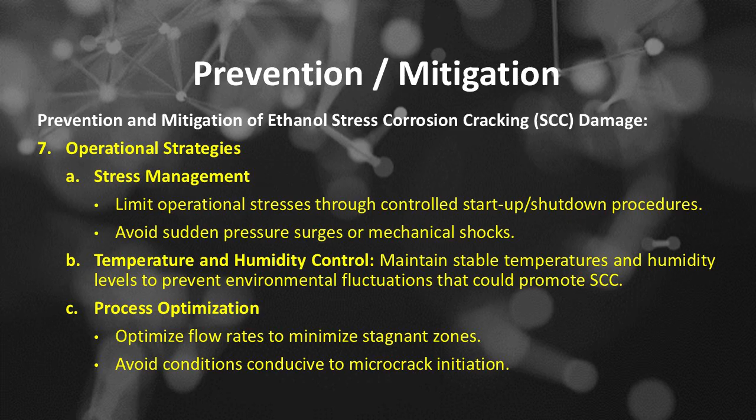C, process optimization: optimize flow rates to minimize stagnant zones and avoid conditions conducive to microcrack initiation. Prevention and mitigation of ethanol stress corrosion cracking damage. Number 8 is training and personnel awareness: educate operators and maintenance personnel about ethanol SCC risks and implement procedures for early detection and response.

Preventing ethanol SCC is a multifaceted approach that combines appropriate material selection, sound design, environmental controls, protective coatings, and vigilant maintenance. Proper implementation of these strategies significantly reduces the risk of crack initiation and growth, ensuring the safety and integrity of ethanol handling systems.

Ethanol stress corrosion cracking damage inspection and monitoring based on API 571. A, it is difficult to visually detect ethanol SCC because the cracks are typically tight and filled with corrosion product. Some small leaks may occur before an ethanol crack can be visually detected.

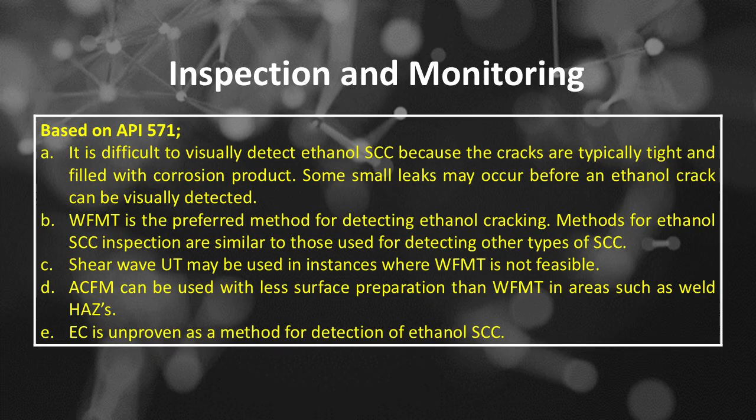B, WFMT is the preferred method for detecting ethanol cracking. Methods for ethanol SCC inspection are similar to those used for detecting other types of SCC. C, shear wave UT may be used in instances where WFMT is not feasible. D, ACFM can be used with less surface preparation than WFMT in areas such as weld HAZs. E, EC is unproven as a method for detection of ethanol SCC.

Here's a comprehensive, detailed overview of inspection and monitoring methods used to detect ethanol stress corrosion cracking damage. These techniques are essential for early detection, preventing catastrophic failure, and ensuring the integrity of ethanol-containing systems. Inspection and monitoring methods for detecting ethanol stress corrosion cracking damage.

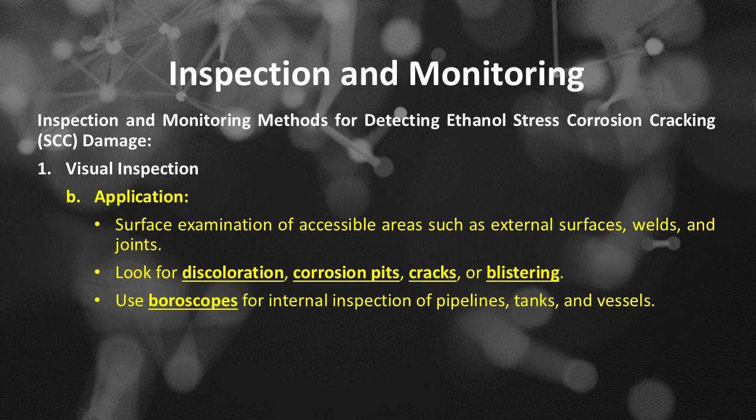Number 1 is visual inspection, the most fundamental and straightforward method, performed with the naked eye or with magnification tools such as magnifying glasses or borescopes. Application: surface examination of accessible areas such as external surfaces, welds, and joints; look for discoloration, corrosion pits, cracks, or blistering; use borescopes for internal inspection of pipelines, tanks, and vessels.

The advantages of visual inspection are cost-effectiveness, immediate feedback, and usefulness for identifying gross damage, corrosion products, or surface cracks. The limitations are that it cannot detect subsurface or micro cracks, and it has limited effectiveness on opaque or coated surfaces.

Number 2 of inspection and monitoring methods for detecting ethanol stress corrosion cracking damage is non-destructive testing, or NDT techniques.

Number A is ultrasonic testing, or UT. The principle of UT uses high-frequency sound waves transmitted into the material. Cracks or flaws reflect the sound waves, which are detected and analyzed. The application of UT is to detect internal cracks or thickness loss due to SCC, suitable for pipelines, vessels, and welds.

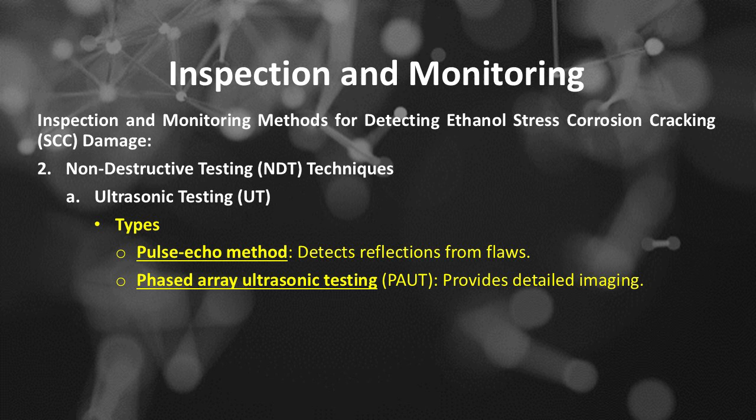Types of UT include the pulse-echo method, which detects reflections from flaws, and phased array ultrasonic testing, or PAUT, which provides detailed imaging. The advantages of UT are that it can locate subsurface cracks and provide quantitative measurement of crack depth and size. The limitations of UT include requiring skilled operators, and it is difficult to perform in complex geometries or on rough surfaces.

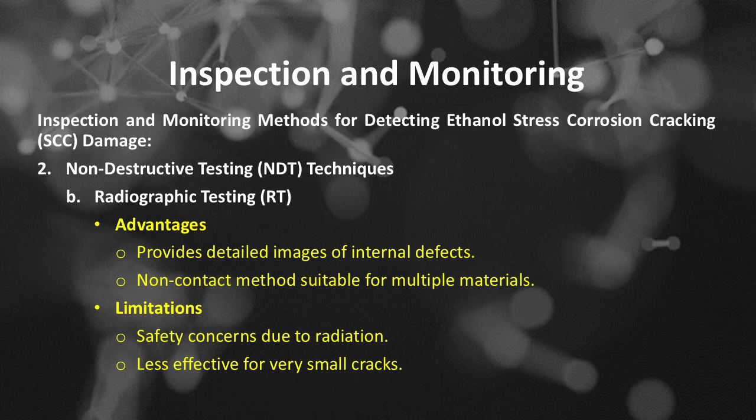Number B of NDT techniques is radiographic testing, or RT. The principle of RT uses X-rays or gamma rays to produce images of internal features. Its application is to detect internal cracks, voids, or corrosion-induced thinning. The advantages are that it provides detailed images of internal defects and is a non-contact method suitable for multiple materials. The limitations are safety concerns due to radiation and it is less effective for very small cracks.

Number C of NDT techniques is magnetic particle testing, or MT. The principle is to detect surface and near-surface cracks in ferromagnetic materials by applying a magnetic field and iron particles. The application is surface crack detection, especially near welds and stress concentration zones. The advantages are sensitivity to small surface cracks and rapid, portable testing. The limitations are that it is only applicable to ferromagnetic metals and cannot detect subsurface cracks.

Number D of NDT techniques is penetrant testing, or PT. The principle uses dye penetrants applied to the surface to reveal surface-breaking cracks. The application is to detect surface cracks, especially in welds or areas with complex geometries. The advantages are that it is simple, inexpensive, and effective for surface cracks. The limitations are that it cannot detect subsurface cracks and the surface must be clean and dry.

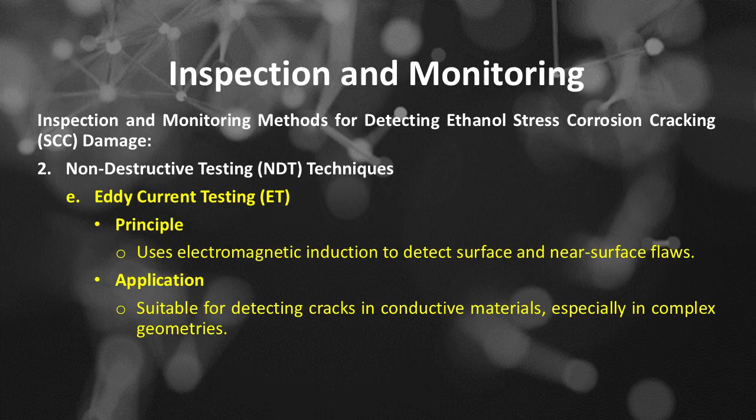Number E of NDT techniques is eddy current testing, or ET. The principle uses electromagnetic induction to detect surface and near-surface flaws. The application is suitable for detecting cracks in conductive materials, especially in complex geometries. The advantages are sensitivity to surface and subsurface flaws with rapid testing. The limitations are limited penetration depth and the requirement for calibration specific to materials.

Here are the advanced NDT and inspection techniques. Number A is acoustic emission, or AE, monitoring. Its principle is to detect transient elastic waves generated by crack growth or microstructural changes. Its application is continuous real-time monitoring for crack initiation and propagation during operation. The advantages are early detection of active crack growth and suitability for in-service monitoring.

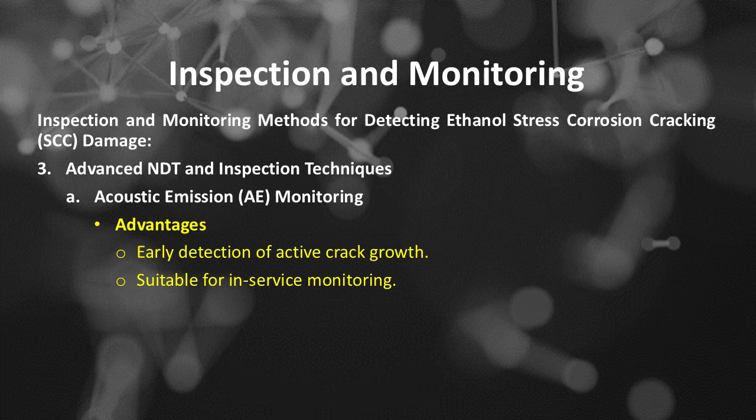Number B of advanced NDT and inspection techniques is digital radiography and computed tomography, or CT, which provides high-resolution 3D imaging of internal defects. Number C is guided wave ultrasonics, which is suitable for inspecting long pipelines from a single access point.

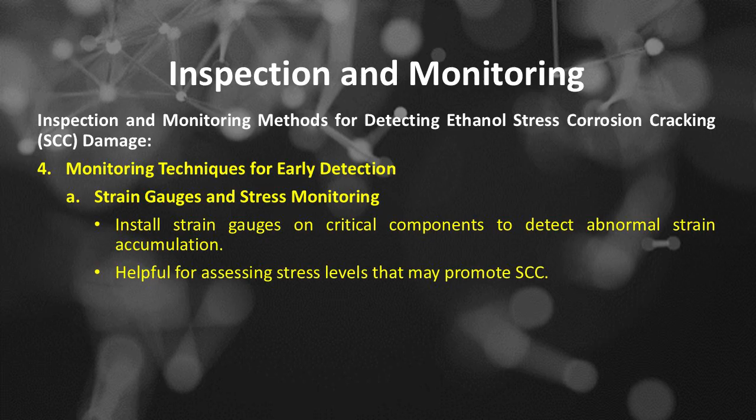Number 4 of the inspection and monitoring methods for detecting ethanol stress corrosion cracking damage is monitoring techniques for early detection, including number A, strain gauges and stress monitoring. Install strain gauges on critical components to detect abnormal strain accumulation. This is helpful for assessing stress levels that may promote SCC.

Monitoring techniques, number B, corrosion rate monitoring. Use linear polarization resistance, or LPR, probes to measure electrochemical activity and detect increased corrosion activity that precedes cracking. Monitoring techniques, number C, hydrogen monitoring, which is used to detect hydrogen ingress that often accompanies SCC, especially in susceptible alloys.

Number 5 of the inspection and monitoring methods for detecting ethanol stress corrosion cracking damage is inspection frequency and strategy. Strategy A is to perform routine inspections, including visual inspections at scheduled intervals, and use NDT methods periodically, especially after stress events or environmental changes. Strategy B is in-service monitoring, with continuous AE or stress monitoring for early crack detection. Strategy C is targeted inspections, focusing on welds, bends, supports, and areas with high residual stresses or corrosive potential.

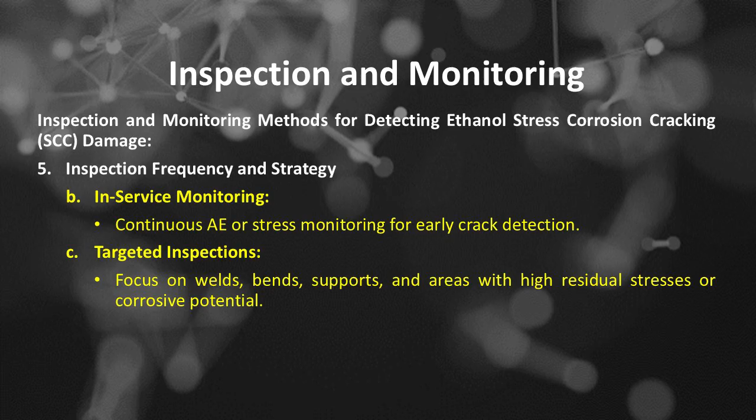The challenges and best practices for inspection and monitoring methods include detecting microcracks, which requires sensitive methods like ultrasonic, eddy current, or magnetic particle testing. Accessibility challenges require remote or portable inspection tools for confined or hazardous locations. Surface preparation, including proper cleaning and surface smoothing, enhances detection accuracy. Data analysis requires advanced data processing and pattern recognition.

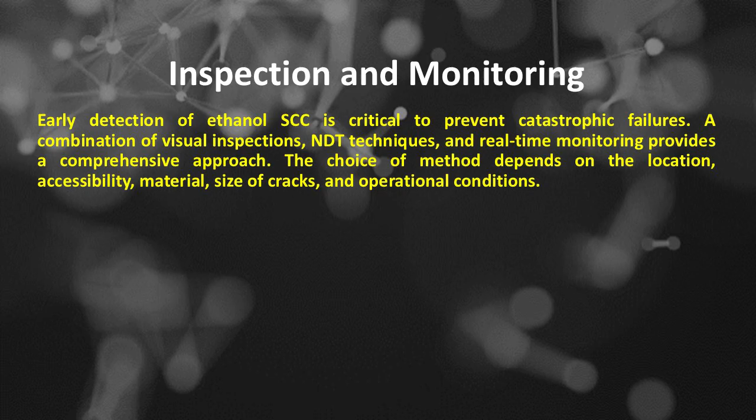Early detection of ethanol SCC is critical to prevent catastrophic failures. A combination of visual inspections, NDT techniques, and real-time monitoring provides a comprehensive approach. The choice of method depends on the location, accessibility, material, size of cracks, and operational conditions. Thank you.